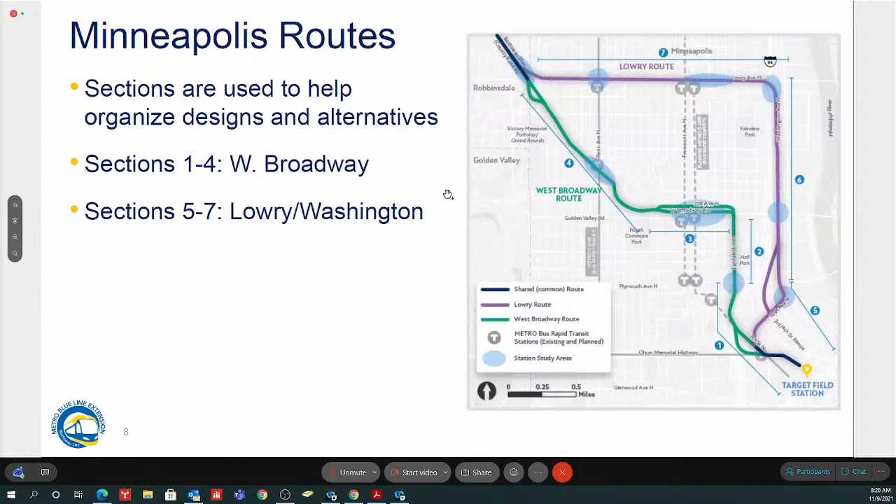Now, sections 5 through 7 are the Lowry Washington route. So 5 takes us again from Target Field Station roughly up to that Plymouth Avenue area on Washington. Section 6 is primarily Washington Avenue from Plymouth up to Lowry. And then section 7 is a very long section, Lowry from basically Washington Avenue over to the West Broadway Lowry intersection. So that's how we've organized it, so you can go in and find this information a little bit better. So next slide, please.

Some of the highlights that we'll have in these sections: we've simplified the links here. So if everybody remembers, earlier on, I think it was even in March, we rolled out the links out of the downtown area, which is shown in the yellow box here. We had kind of the rainbow spaghetti, as we referred to it, with a lot of different options. As we've worked with the project partners, we've dove into these links and how they would fit and connect. We've kind of narrowed those down.

We've taken out some of the link options that were challenging or beyond challenging, probably not feasible, of either how we were getting off in Target Field Station, or as we were trying to find a route that navigated through the community. We were finding areas that were very high impact, or the alignments just would not fit very well.

We also have route options along 21st Avenue for the West Broadway. So that's what I'll call operational opportunities that we can look at and review as we're going through that section 3 area. And then up at the North Memorial area, we'll have some options there for how we get the light rail either off of West Broadway or from Lowry onto County Road 81.

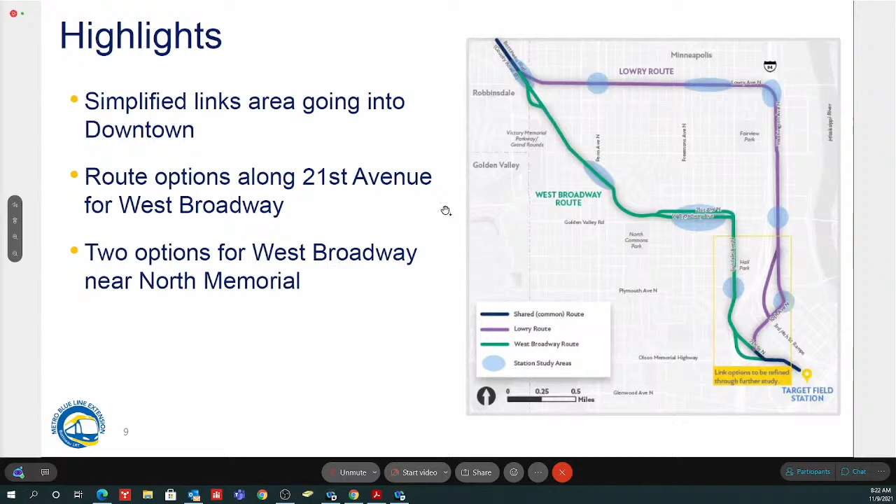Diving even farther down into this map here, and this is really going to be a key to find those alternatives in each one of these sections. So what we're seeing here is each section has multiple alternatives. We wanted to give some options so folks could see, again, what the challenges were and the opportunities. So there's going to be alternatives in there that are very impactful. They seem like they were probably the most intuitive at first as you roll them out, but we see that there were a lot of impacts involved with those.

So then we've looked at alternatives in each one of these areas that try to mitigate and limit the impacts that one option may have to the community. Again, each one of these alternatives is going to show different challenges and opportunities. And these alternatives are just to help inform folks to digest and form an opinion on which route would be the best option.

Good morning. I was wondering if there's a question out there. Just a little background noise.

So each one of these alternatives, we don't need to decide on these now. They're just more informative of how things will work within that route, and they can be carried forward after a route has been selected and into the design phase. So we don't need to spend a lot of time worrying about which alternative needs to move forward. It's more a basis to help inform how a route would work and what the alternatives would be on that route. So in the yellow boxes there are the different alternatives that you'll see.

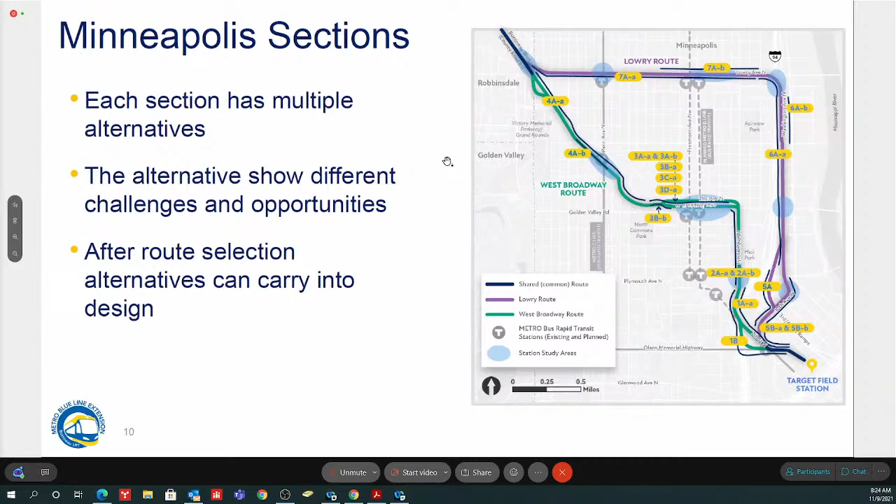Next slide, please. So again, I'll stop and take a break there if there's any questions on how we're laying it out. So kind of a lot of work, but just how we're rolling out. When we go to the in-person workshops, we're going to have 7 different stations for each one of these sections that are going to lay out side by side what all these alternatives are. So it'll be really easy to see, okay, I'm in section 7. What does section 7A, section 7B, what are the differences? What are the alternatives? How does it work? So to inform the public, the community, our partners on how things fit in.

Quick question. Yes. The alternatives, is there going to be a time set that these routes are going to be chosen, so that there's no confusion about whether the alternative is going to be used or not? First question. And the second question is, could you talk a little about 63rd Avenue? 63rd, the station up there, is that the question also? Yeah. Okay. Yeah, I can talk about that a little bit. We are focusing on the Minneapolis section here in the rollout, but yeah, I could take a question on that.

So alternatives, let's take that one first. As we're rolling forward, we move forward with a recommendation for route selection in that March timeframe, and that goes through the advisory committees and our process there. We can pull those forward into design. So when we get into design work, our initial environmental work, post-March timeframe, will be when we really take a stab at what those impacts are, what the mitigations are and what our design challenges are. And that's when we'll start narrowing down which alternatives to move forward with. And we'll continue to use this format with our advisory committees and our community outreach to help bring that process along.

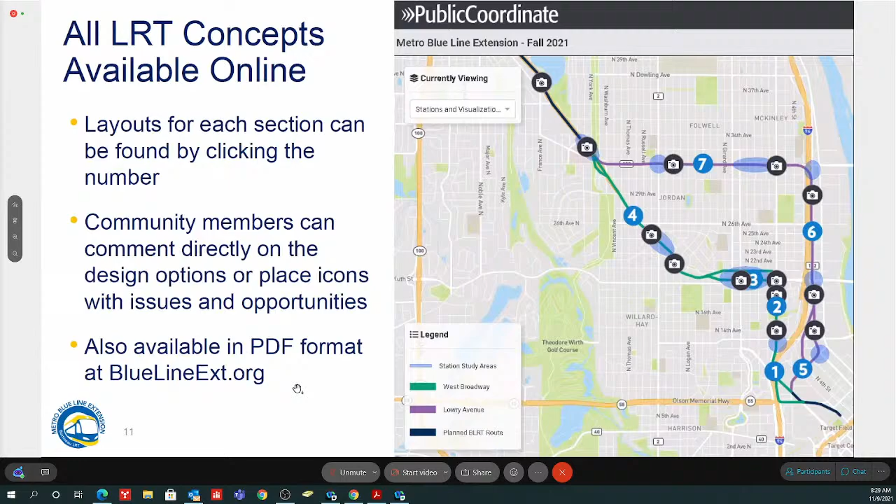Excuse me, I had to sneeze. So, last one.

So again, the whole purpose here is we're trying to seek community feedback. This information is being shown to help folks decide whether a West Broadway or a Lowry route should advance through there. So this is kind of that open process to get that input. We're showing multiple options in each section on both routes, so folks can get the idea of what the opportunities are and how we can adjust things and avoid things and move things around with alternatives. All of this will be detailed and refined as we get into design and start doing our environmental and engineering work, and we'll be working on this over the next few years after a route is selected.

I think another thing to note as we start looking into these concepts is these are concepts. They just help to picture how things will fit in. Again, they're based on a very minimal amount of design. They don't show things like greening, a lot of the ped bike connections that will be very important. And those are all things that we'll address as we get into design and dive in.

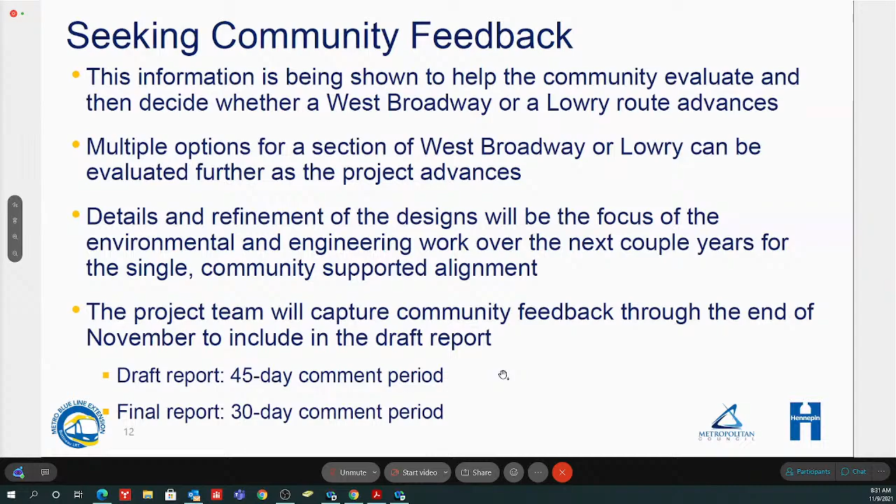And then after that, we get the comments back. We're able to digest them, discuss them. Then we will pull together that final report, and that final report will be in the March timeframe is what we envision. And that will also have a 30-day comment period for folks to look at the report and weigh in on it.

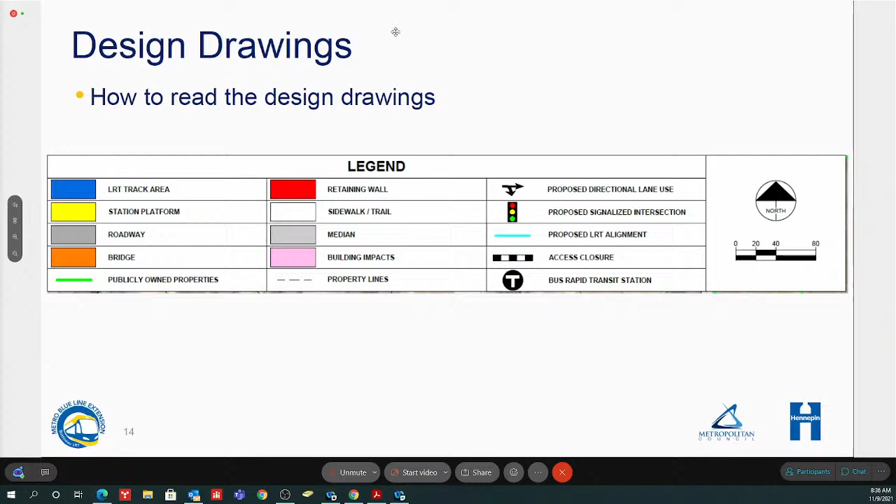Yeah, I'm trying to see if I've taken everything from that chat. Okay, yeah, just all the features of the interactive map, explaining that a little bit more. Okay, please say anything else. That covers it. Cool. Okay, back to you, Nick. Okay, so let's jump to the next slide, please.

So I wanted to just highlight section 7 here and take a look at that. What we're going to look at is in that dashed blue box along section 7, where we have a couple alternatives, 7AA and 7AB. We're trying to be organized and make it clear, but even some of that nomenclature may get a little confusing. What we want to do is look at the design challenges along this alignment, and like Lowry Avenue, there's a lot of unsignalized intersections.

So if the track is going down the roadway and there is a crossing, it needs to be signalized. Those signalized intersections add impacts. We just discussed that if there's a signalized track crossing, we need left turn lanes, and those left turn lanes start growing the footprint. Also, this is mostly residential land, with residential impacts along Lowry. Not all, but there is quite a bit more residential along here, specifically single family residential.

And so there's potential for more building impacts that aren't shown if we add pedestrian crossings. In these plans we're showing where the signalized crossings are, but as we go into design, we need to provide adequate pedestrian crossings so it's convenient. Folks don't have to walk 6 blocks to get to a crossing, it's only maybe a couple blocks to get across those tracks in a safe manner.

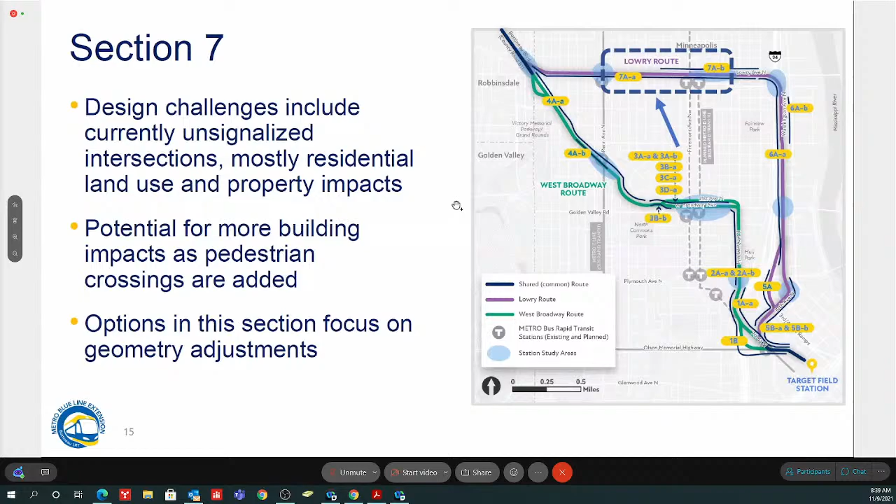And when we do that, we try to have boxes where people transition as they're crossing into the tracks, so they're facing the direction of trains. That starts adding space also, so there's potential for additional impacts where pedestrian crossings are. The options in this section are more focused on geometrics, meaning how we move things around within the roadway and how we mitigate impacts that way.

This map is a very good example of why all the information we have out there can get overwhelming. At an in-person meeting, this map will be at a larger scale so you can read it clearly, probably at least 8 feet long on a table. As you pull up the PDF and zoom in to see how each intersection works, there is quite a bit along the segment. So we broke this down into a couple sections so we can zoom in and look at more detail.

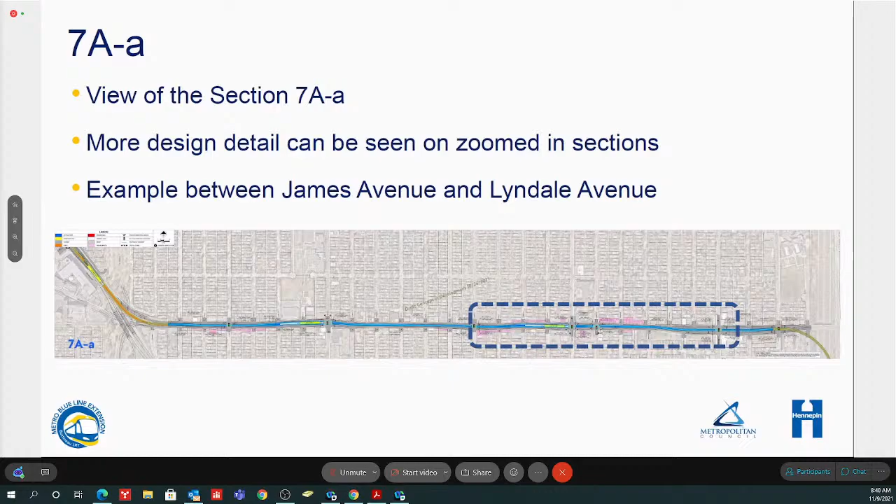And really what we're going to look at here is a couple examples or alternatives between James and Lyndale Avenue, so folks can see how that fits in. This map is a section of 7AA, and what we're highlighting is station placement along the alignment. With the D-line coming through, Emerson Fremont is really an obvious place to get those transit connections through this area.

So we looked at how to fit a station within the context or within this area. And as you fit the stations in, the tracks have to widen out to go around the station. So there are impacts from how that lays out in there, and with the left turn lanes in, there's a lot of different things going on.

So you can see in this that shown in pink, there's a lot of properties that are impacted here with this design. And again, those pink properties are building impacts, and we're really not showing at this time if it's 1 foot or 15 feet into the building. It just knows that there's a concern that there could be an impact to that building on those properties.

Some other things that you're going to see key on this map: again, the blue is the light rail going down the roadway. This is at grade again. The yellow is that station location on the left side of Fremont, and how that would fit in there and how you would access that station platform. The green boxes that are outlined around properties indicate publicly owned properties, whether it's the city or the county or other public agency or entity owns those. So we've just kind of highlighted that to put that in context.

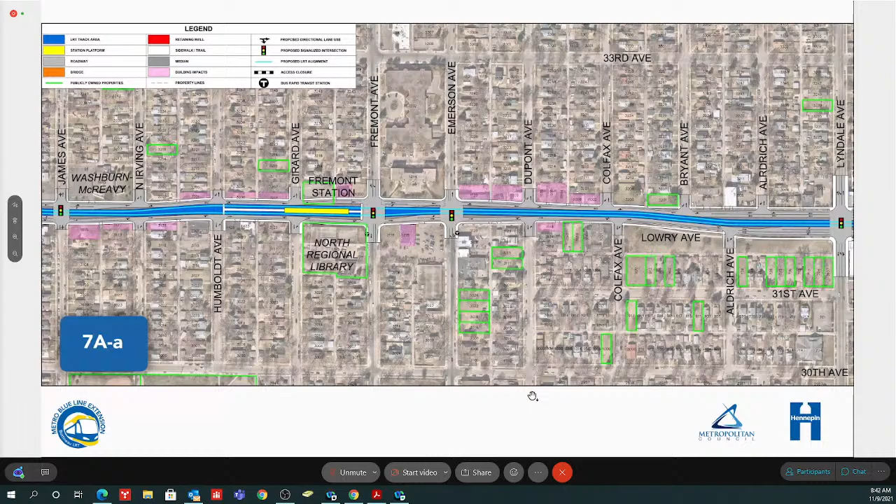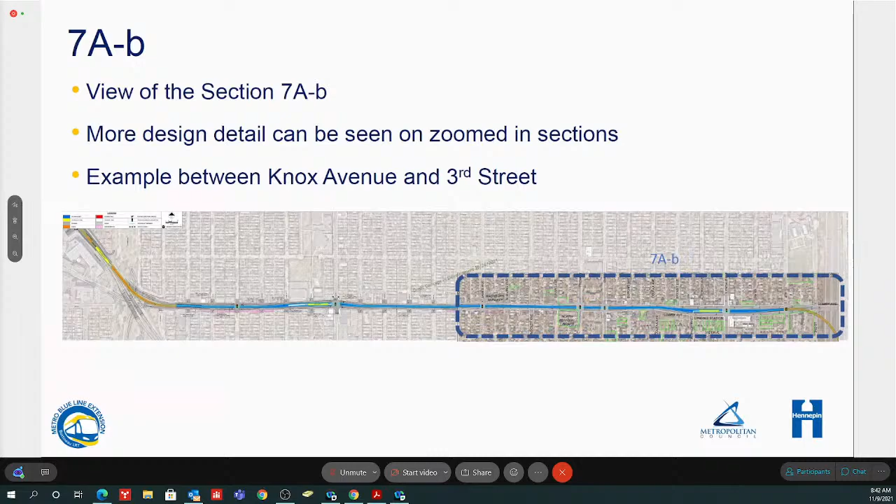So what we can see here is a comparison then to a view of section 7AB, which is a different alternative. An example, this is between Knox Avenue and 3rd Street. So a little bit wider span, but it shows a different station location. So we're widening it out here so we can see, all right, the station had some impacts as we put it at Fremont and Emerson. If we slide the station down, maybe closer to Lyndale Avenue, what are the opportunities there? And can we go back to that last slide, please?

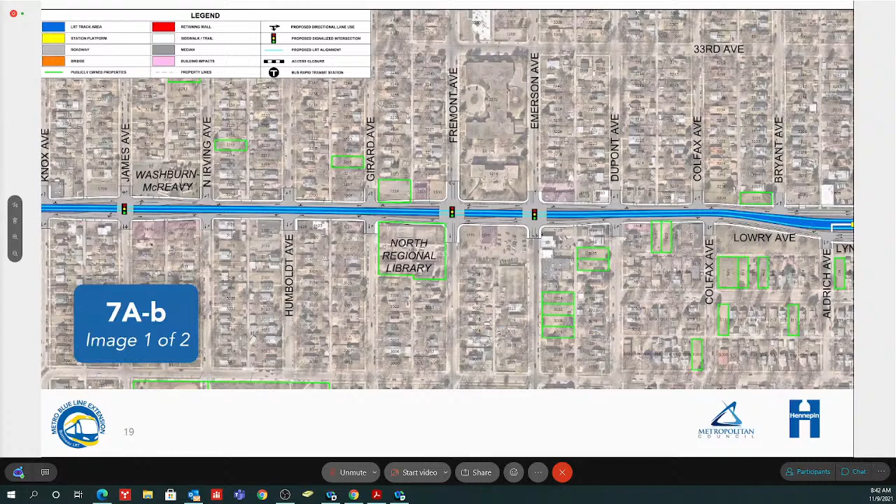So here you can see that by not having a station placed at Emerson Fremont, it really does limit the impacts to the properties around it. You can see a lot of the pink that was shown there. Those building impacts are not in this alternative alignment. And so then let's go to the next image, please.

This shows the station now located at Lyndale. And one of the key things here is there's a lot of public right-of-way at Lyndale Station. It's a lot wider there. There's some kind of open green space in this area. And so by putting a station in this location, maybe we don't have that direct Emerson connection. It's a little bit farther over to the Emerson Fremont D-line stations, but the station would fit in there with less impacts to properties.

Some other things you can see here on this map: on the right-hand side of the screen is a bridge that would come from Washington Avenue over and connect into Lowry. So that would be a bridge structure that's shown in that kind of orangish color. So I just went through quite a bit of information really quickly. You can see how these alternatives lay out to give folks an idea of how moving things around can change how the potential impacts are along the alignment. Any questions here?

I'm just gonna have to wait till I get there to look at this because it's really small on my phone. Yeah. I can imagine that.

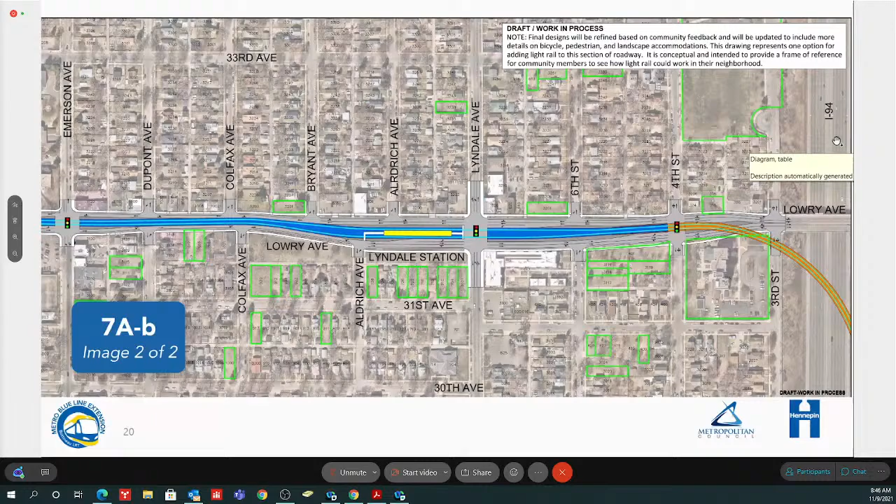So with that, let's move into section 3. This is again that section 3 along the West Broadway alignment, and the area we're focusing in on is from Lyndale Avenue to Irving, and this one really has a lot of different options there, and there's a reason for that because of just the tight space that we're in. We have many different concepts out there. I think some of the most straightforward concepts where we keep everything on West Broadway do have more impacts to properties, specifically buildings, and so that's why we have quite a few more options.

Some of the design challenges here are, as you can see on the map, the curves and humps that are along that alignment. It's not straight or linear. It kind of moves all over the place. Being able to accommodate necessary turn lanes where we have intersections, and the tight overall right-of-way with building faces right up to the right-of-way really make this area a little bit more challenging. Whereas on Lowry, in a lot of places there's maybe a little bit more setback from the right-of-way. Here, some of these building faces and fronts are right on the right-of-way line, right on the property lines.

So our alternatives here focus on not only the roadway geometry, how we can move around within that road and right-of-way, but also on some operational adjustments to think maybe a little bit more outside the box of how we can either pair roadways or separate light rail from a roadway, or some other options. So we'll take a look at those. We're only going to look at a couple of these alternatives here, out of respect for the time that we have. So next slide, please.

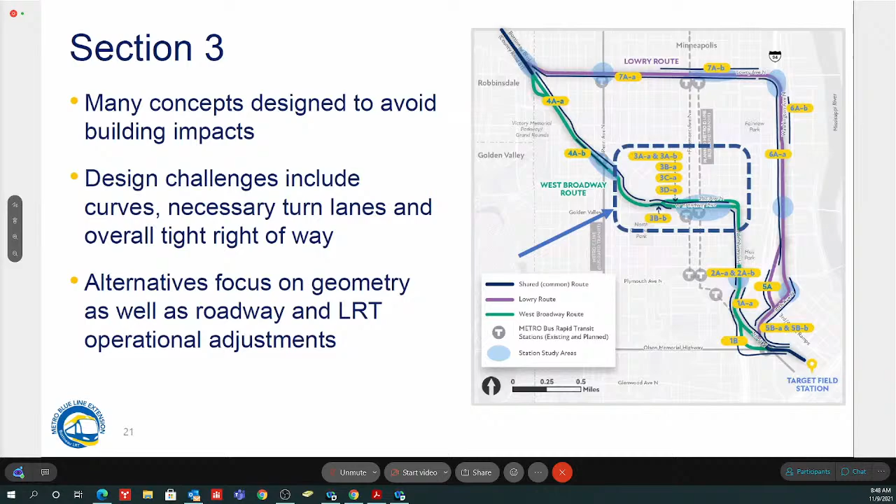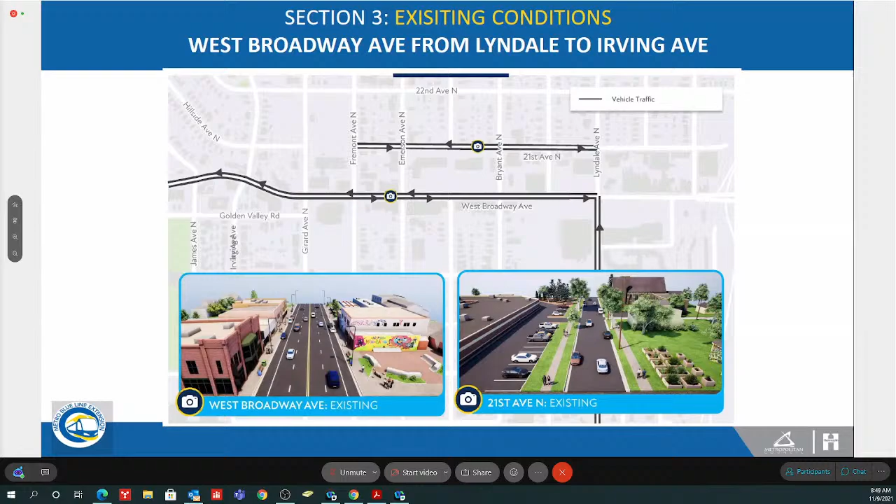So with this area, we've included a couple of schematic or line drawings here to help folks understand a little bit better how things do operate and can operate. I think folks have maybe seen some of these boards out there, but this is an existing condition, and we'll talk a little bit more about why we're showing 21st Avenue here as we go into the design slides. West Broadway here on these line drawings is shown from Lyndale to Irving. There are 2 lanes, 2 directions of traffic on those roadways, and the same for 21st up there. It operates as bidirectional. So there are some existing graphics on the bottom there that help folks visualize what it looks like today. I think folks have seen specifically the West Broadway existing example before in previous presentations. So next slide, please.

So this is looking at section 3A-b, from Lyndale to Irving, and this is what it would be if we keep at least a lane of traffic in each direction on West Broadway, and we put light rail along West Broadway too. So we come from Lyndale Avenue to West Broadway and keep traffic and light rail within the West Broadway footprint. And there's a graphic again that we've seen before in presentations with the center running light rail, a lane of traffic on either side with sidewalks on the outside, and how that fits in there. In the middle of the blocks, in many cases, it fits very well. It's really as we get to the intersections and station locations that it proved to be challenging.

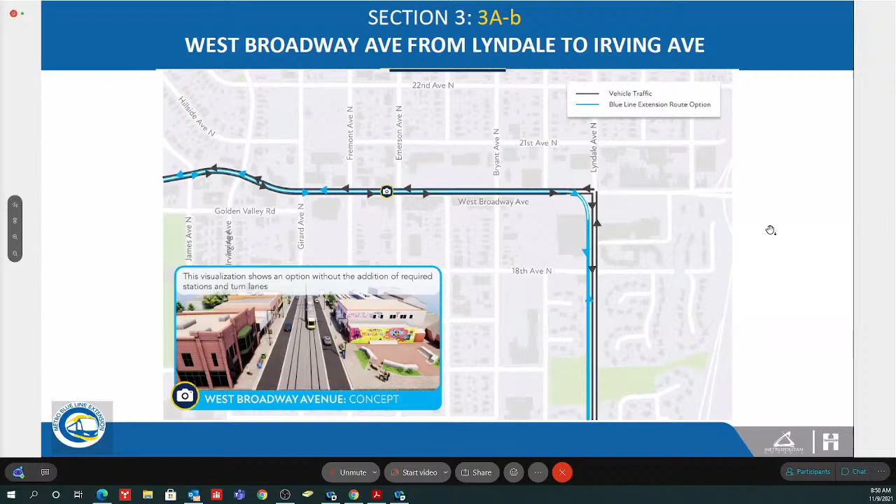So next slide. This shows that alignment with the more detailed plan drawings, and how things could fit within there. We show the station right around that DuPont area between Emerson and Bryant. And with the geometry, with turn lanes and such, the pink again shows what the potential impacts could be with this alternative. So you can see there are quite a few pink buildings along that alignment, and that has to do with both the track geometry through here and left turn lanes as we go through those signalized intersections.

Again, the green shows some of the publicly owned properties around there on that last map. Any questions on this as we're looking at it? I don't want to race through it. This is probably the first time folks are seeing this. I know, again, a lot of these pink properties could be surprising to folks.

But again, this is just an alternative, an option, and what those impacts would be. As we get into design on any of these alignment options, we will work very hard to mitigate those impacts and try to avoid those impacts that are shown in pink.

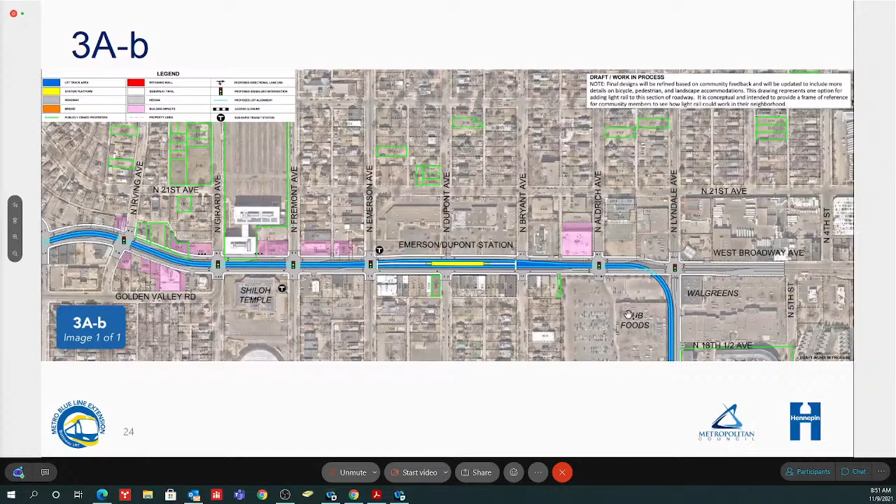All right, let's take a look at another alternative here. So from the pink that was showing there, that's where we want to keep with our project principles and try to minimize the impacts to properties, businesses and residents. So what are some of the alternatives that we could do to limit that and avoid it as best as possible?

So what we came forward with is an option that starts bringing in 21st Avenue, and there's quite a few alternatives on the website that have some different operational configurations. This is where I was talking about not just geometric but operational, how the roadway could operate and how light rail could operate also. So this option... can we go back to that last one, please?

Yeah, this option shows maintaining a lane of traffic in each direction on West Broadway, and bringing light rail up to 21st Avenue. That light rail would come up from Lyndale, connect to 21st Avenue, be both directions there. There would likely be a station up there in some place, and then it would go behind the Minneapolis Public School building, and then tie back in at Irving.

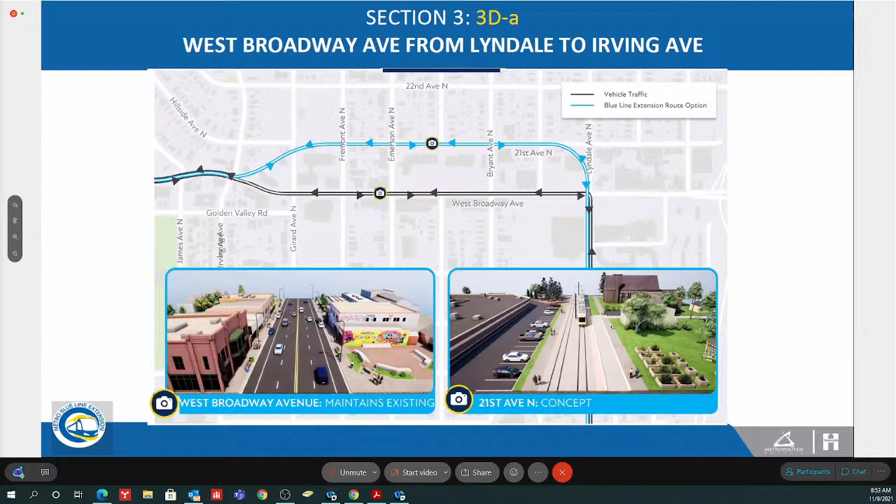So now let's pop into the map. This map shows what that stick configuration has. Traffic remains on West Broadway in this alternative. Again, the pink shows what potential building impacts could be with this alignment. The blue is the light rail going up to 21st from Lyndale.

A station is located roughly centered on DuPont between Emerson and Bryant. In this condition 21st would not be the through lane road that it was before, but there are connections between the streets, so it doesn't cut off alleyways or road connections. They can operate to 21st there.

There are some additional signalized intersections shown on 21st to accommodate light rail and light rail crossings. And this shows the alignment again in a little more detail of how that would fit behind the Minneapolis Public School building, and then make that connection back to West Broadway in this area. Any questions or comments on this alternative and how we got there?

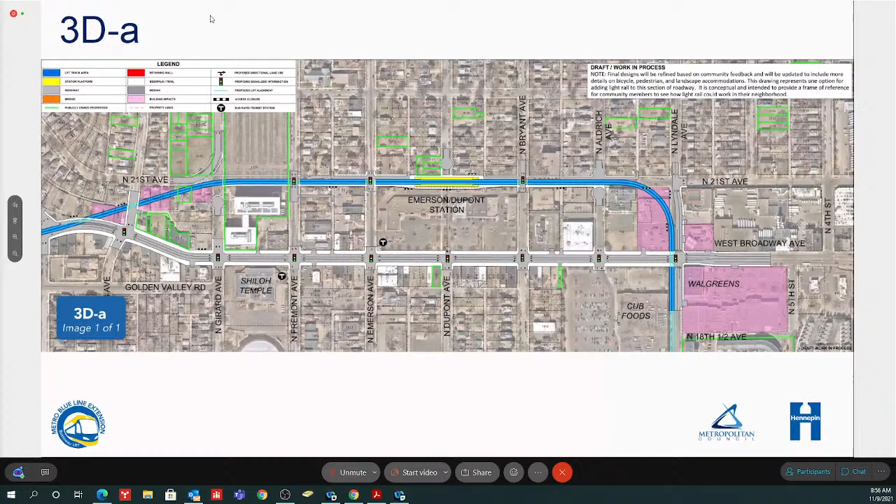So where I was going with this is these are alternatives as we get in design. Really our goal is to try to mitigate or minimize any impacts that are showing in the pink. Obviously if we're going right through the middle of the building and you can't really avoid it, that's tough. But some of these building impacts may only be a foot or two, and can we do some geometric adjustments to avoid those?

Those are things that we haven't rolled up our sleeves in that much detail in any one of these alternatives. It's more of, let's fit a section through here that we know meets the city's transportation policies, the county's policies for roadway and for light rail out there. So it's kind of the initial stab. But as we get further in design, we'll do what we can to minimize these impacts that are shown as a route is chosen, and as we start looking at the best alternatives within that route.

Any other questions while Sophia's trying to bring that up? We have had challenges trying to share live on these, so that's why we have it in a PowerPoint right now to get through these. As we start bringing up some of the websites, we're finding it might not even be the size, it might just be compatibility. Sometimes it's crashing us out. So yeah, my PDFs are being too slow, so I am actually just going to share Public Coordinate because Public Coordinate tends to not have issues when sharing electronic files. So it might be

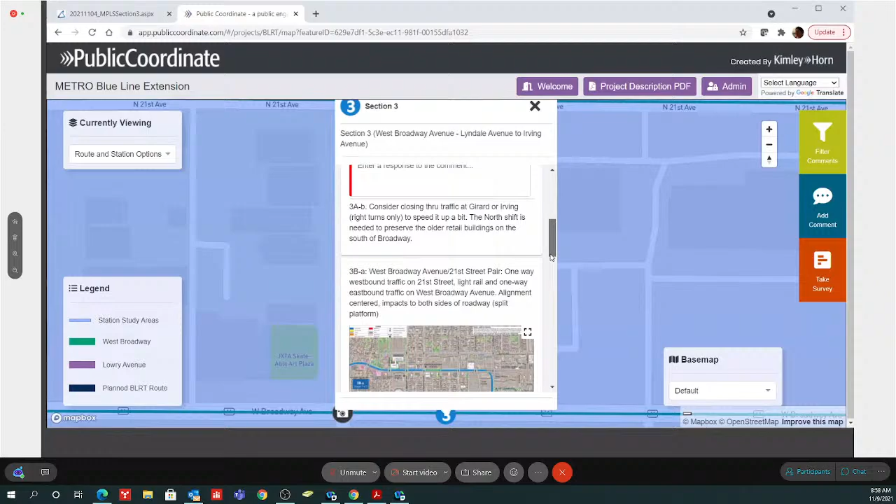We'll be able to zoom in a little bit to it. When you're on Public Coordinate, if you click on the section number, it'll open up and you'll get this kind of list of all the options. And then you can expand it and zoom in. So Nick, I can just click forward and we can go through the various options.

Maybe the first one on the screen for folks is just if you literally put the train down the middle of the roadway, and was kind of the starting point for how we developed the rest of the options. Yeah, you can see that this is kind of the baseline where, like we said, we put everything down West Broadway through this area, and there's a lot of pink, a lot of impact shown.

So that again is the basis of why we are moving forward with multiple alternatives through here, so we can minimize those impacts. So moving from this option is how we got to the 3A-b that we just showed in the PowerPoint, basically trying with the geometry of the track to minimize the pink while keeping everything in the roadway itself. And then noticing that we were still hitting some community cultural assets, we started to explore the options that utilize 21st in various ways. These are ones that we didn't go through, so I'll turn it over to Nick to talk about them.

Yeah, this is 3B-a where we start splitting operationally the traffic that's on West Broadway. So light rail would go down West Broadway both directions, but one direction of vehicle traffic would be going eastbound on West Broadway, and the other direction, this is kind of a one-way pair like Lake Street is in some locations, where the westbound lanes would be moved over to 21st on this option. So that's what's showing there.

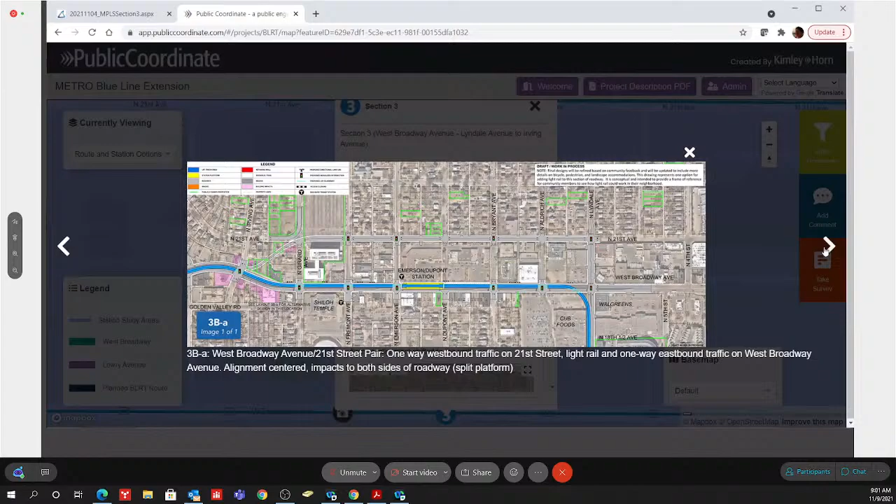And then this is what we would call a flavor, or another portion of that alternative. So the last slide you saw, as we were coming from Girard, it diagonaled through the block to Irving Avenue to connect in. This one's squaring it up using the existing roadway network and taking 21st over to Irving and teeing up that intersection. So it's a little bit more using that existing roadway network here with this option.

And then this is an option where we look at splitting the light rail along this area. So we maintain two directions of traffic on West Broadway, and then we split the light rail between West Broadway and that 21st area, and 21st would be able to, I believe in this one, keep one direction of travel on it. So it would be one way.

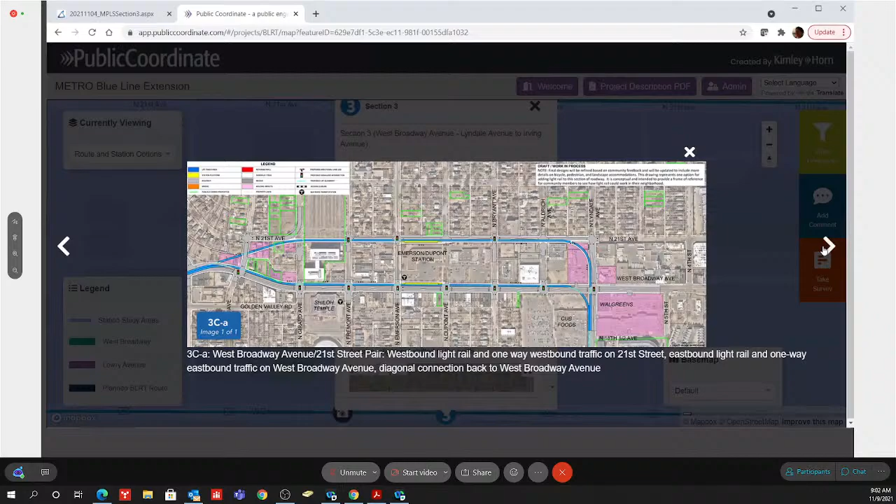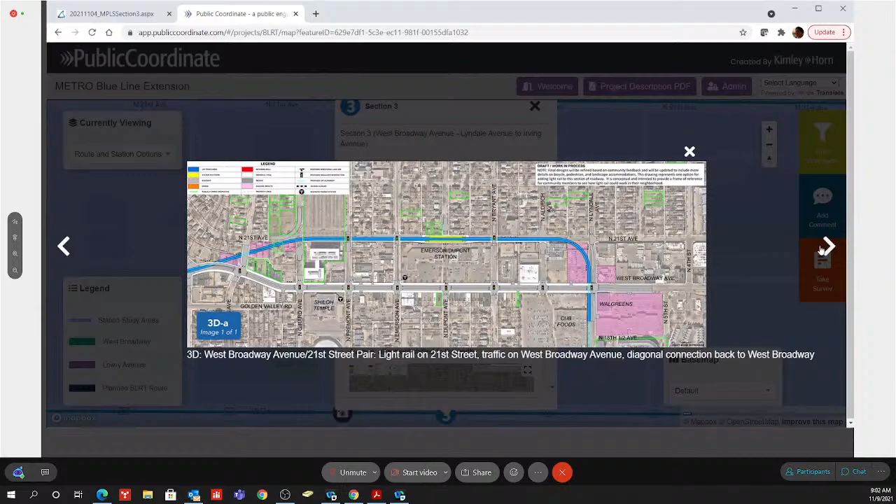Pluses with the impacts to properties, but that last one you can see we split the stations by a block, so it gets a little bit tougher for the station folks to make sure they're at the right platform for the right direction of train. And then yeah, I think this is kind of an option or an alternative that we looked at before with taking light rail up to 21st and maintaining the traffic on West Broadway. I think that's all of them in that series.

We get back to the beginning, but just to kind of, you know, the pink sometimes looks really big in some places, and kind of like what Nick said, these designs are super preliminary. So in an option like this, there's ones that obviously kind of go through a building. And then there are maybe more minor impacts that through design refinement, you'd be able to minimize those impacts. Sometimes we show a whole parcel in pink when it might just be a portion of something that is impacted, and it would kind of be worked out. So,

part of what the staff is trying to do is show at this stage the level of design and knowledge that we have, kind of like that maximum impact versus saying, oh, we might be able to figure it out, don't worry about it. But also knowing that there can be design refinement in the future should one of these be a preferred method.

Hey, sorry, one clarifying question, Nick. On 21st, on the last 3DA, would there be any driving traffic, or would it be just the light rail in this? The one we're looking at, the 3DA, right now, it would be primarily light rail on 21st. Now, it's hard to see at this level or scale, but there are some connections, for instance, there's alleys that connect in there. So we would have a small alleyway that would connect up the alley between Bryant and Aldrich. So there are some connections there, but not through vehicle traffic in this option.

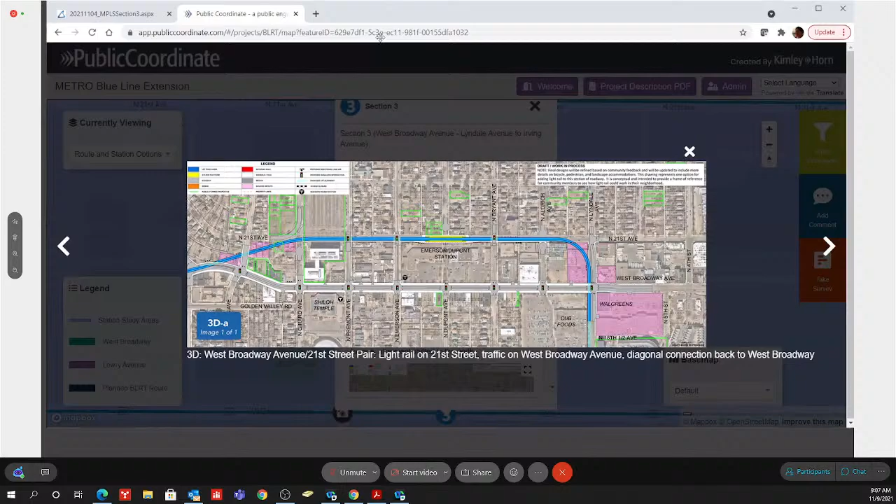Okay, I may bring back up the PowerPoint, but again, we can pull up any of the West Broadway or Lowry options that folks have questions about as we're going through this all. Any other comments, questions, general thoughts, feedback for staff from the committee?

Again, we encourage anybody that can, if you're interested, to come to the open houses. The in-person ones I think will be really helpful to have more one-on-one discussions and be able to point at things and see everything laid out in detail and together. So.

Okay, chairs, let me know what you think. I think we could probably move on to the next agenda item if you feel the committee is ready, or want to prompt for more discussion, or wherever you feel we should go at this time. Yeah, we're going to have better communication when we can see these things in 8-foot or 10-foot layouts, which will benefit me for sure quite a bit.

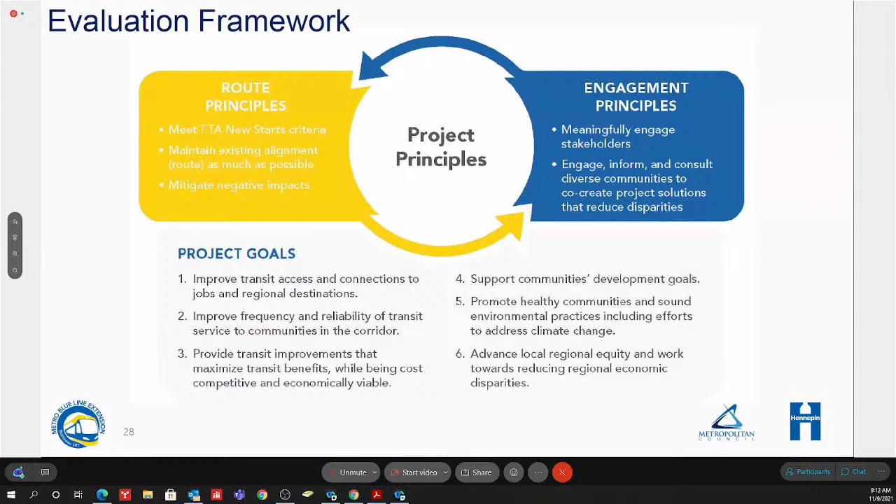So if we can move to the next slide, I'll show a little bit about what that evaluation timeline looks like. So we will spend our next meeting in December bringing back that feedback from the workshops, that really intensive work, the community outreach, those one-on-one conversations that Sophia and her team and others are having, and help us kind of filter a little bit through the evaluation pieces to bring forward for your consideration in December,

a walkthrough of the evaluations that we think are going to help community members get to saying, yeah, I think when we measure the success and maybe the challenges of either a Lowry, Washington or West Broadway route, that this really captures those metrics that we're very interested in. That will also be part of the draft report that we will release in December.

And again, the draft report and all of its information, including the evaluation criteria, will be out for public comment. So it's also another opportunity for community members and residents and businesses to say, yeah, we think this really hits it, or can you also consider this metric, for example, as something to think about in the evaluation. And that will help inform the final report that comes out in Q1 of 2022.